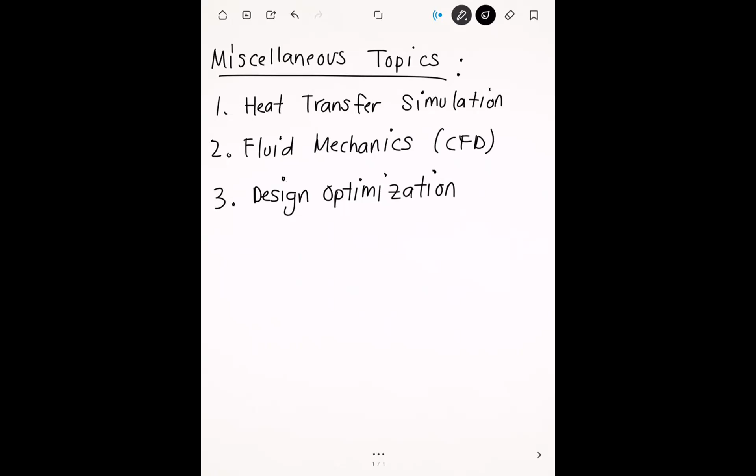How's it going, Dr. Tran? I'm good, hanging in there. Almost the end of the semester. How are you doing? Just stressed. I know, hanging in there as well. I'm hanging in there. It's crunch time right now for senior design. I bet, yeah.

What do you guys have to submit by the end of this? You have to do like a final presentation or like a design proposal? Right now, we scheduled a meeting with Dr. Mayoral. So we're meeting with him on Thursday for our critical design review. Okay. So after that, if it looks good, he'll give us the design freeze. And then from there on, we got the go ahead to work on our proposed designs. Cool, cool. Well, hoping for the best. Thanks. So are we.

How's your weekend? It's good. You know, busy but good. Yeah, I feel you. Oh, I do have a question about the final report. Maybe I can show you later after class. Okay. Or you can ask now if you want, we have some time right now. Okay. Yeah, sure. Well, I'd like to at least show you my screen about it. Oh, okay. Let me go ahead and swap that. It's not important anyway. Okay, go for it. Let me open my stuff first. Starting mechanical. Still loading. Give me a second. All right, there we go. Oh, I cannot share at the moment. Oh, sorry about that. No worries. All right, go for it. Oops, screen one. There we go.

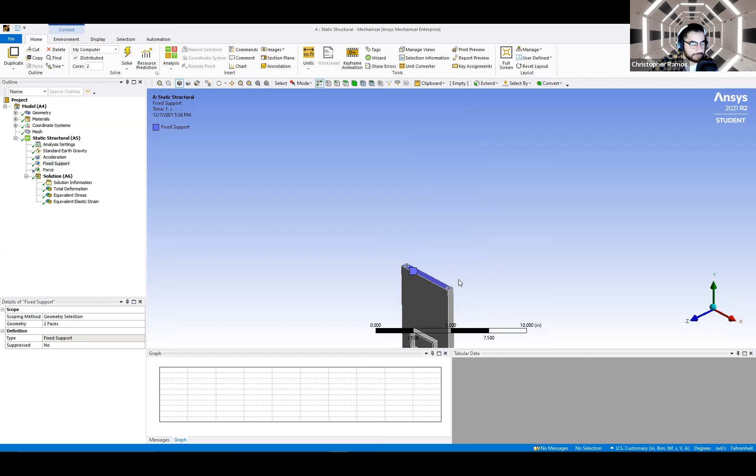I was working on my sled design for the rocket team's avionics sled. This is basically supposed to hold our electronics, and I set up some parameters. I wanted to ask you if this is a good idea. I applied a fixed boundary condition on the top and bottom, since this whole thing will be fixated by these threads over here, as you can see. So that'll hold it in place. And I enacted an Earth gravity force. As it's going to be launched, it'll shoot upward.

And I was wondering, what would be my best way to supply the amount of force? Would it be a force by acceleration or just the force by the rocket thrust? Right now, I have it based on acceleration, but the force I do have existing, I currently have it suppressed. Honestly, I think the acceleration does exactly what you say, but I like to basically apply an upward acceleration, what the force would be required for that. And I'm guessing you're applying it for the entire body, right? Yeah, for the acceleration.

I personally have not experimented that much with the acceleration, so I would lean more towards the force just because that's how I've usually done these things. Have you compared the results? Do they look similar when you do one or the other? Yeah, they're very small in nature, so I'd say it's pretty much similar. Okay. If they're pretty similar, I would just stick with the force.

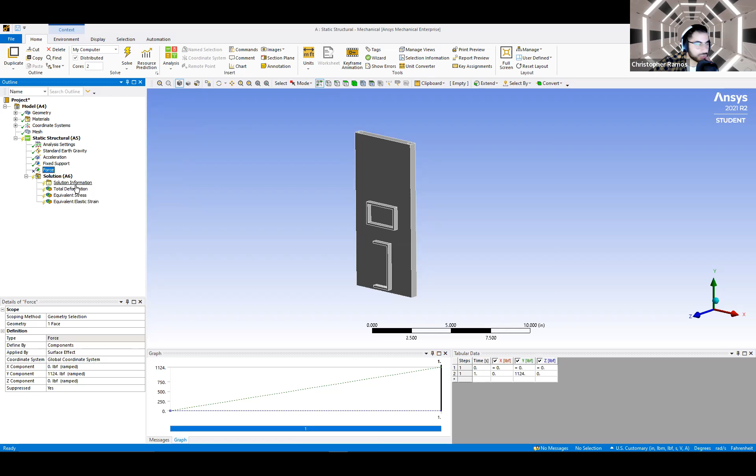The thing is, I think with this one, the more accurate thing would actually be the acceleration, because that's what it's actually doing. So if visually you're not seeing that big a difference between the results, I would actually go with the acceleration, just because that's more realistic. Intuitively that's what I would do. With knowledge of all things, I would choose an acceleration on this. It's just that I haven't personally used it all that much. For your application, I think acceleration makes more sense intuitively.

Alrighty, cool. Because the deformation is stupid small. And I expected this to survive that amount of acceleration either way because of the raw calculations we had to do for senior design. Okay, yeah, that makes sense. Hopefully something like this shouldn't break just because the whole rocket is accelerating. So this all makes sense. Cool. Okay, yeah, looks good. Awesome. Thank you. Yep.

One more thing about the project. I want to ask about simple modeling. What do you mean by that again? Can we get like a refresher? Right. So the simple model is basically a way that you're going to use to validate or verify your results.

I don't want you to just rely on finite elements to get your solution, because in reality you're always double checking the finite elements against something else. The best thing to check against would be some kind of experimental data, like if you ran a physical test on your geometry. But probably the simplest thing that you can do is a hand calculation, simplify this as much as you can so that you can calculate this by hand.

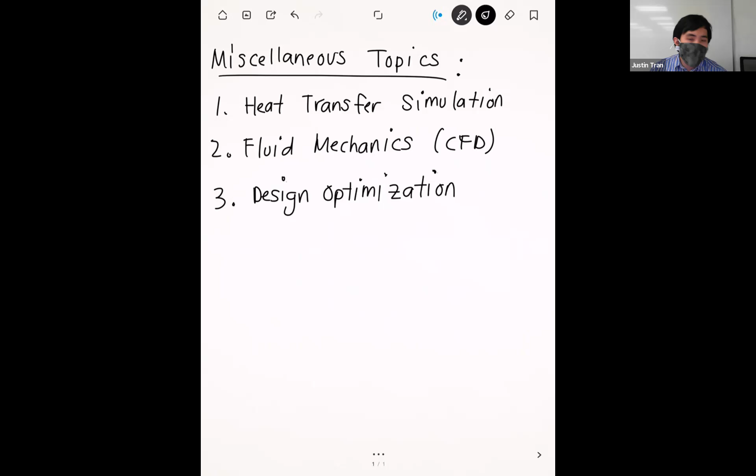So has everyone taken heat transfer, or are some of you planning on taking it next semester as well? Okay, so I think there's probably a mixed bag of people who have taken it before and people who haven't taken it yet. So no matter where you are, I think this lecture will be useful because it'll review a lot of really core concepts of heat transfer, only really the ones that you need to run simulations.

All right, so let's do heat transfer review. Let's start by talking about why we can solve heat transfer problems in finite elements in the first place. If you think back to the very beginning of the class, we talked about finite elements as just a general methodology for solving differential equations.

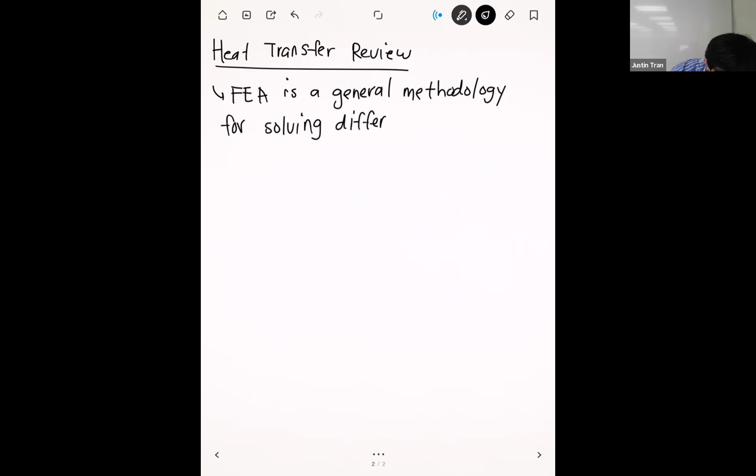We've mostly just been focusing on one differential equation, which is the structural one, but heat transfer has its own differential equation as well. And that equation is called the heat equation. In my opinion, the best named equation in all of engineering.

It's not named after some random scientist dude in the 60s, or the 16th century. And so the heat equation, in the most general form, has something like this. And this is, of course, the 2D version, but there's also a 3D version as well.

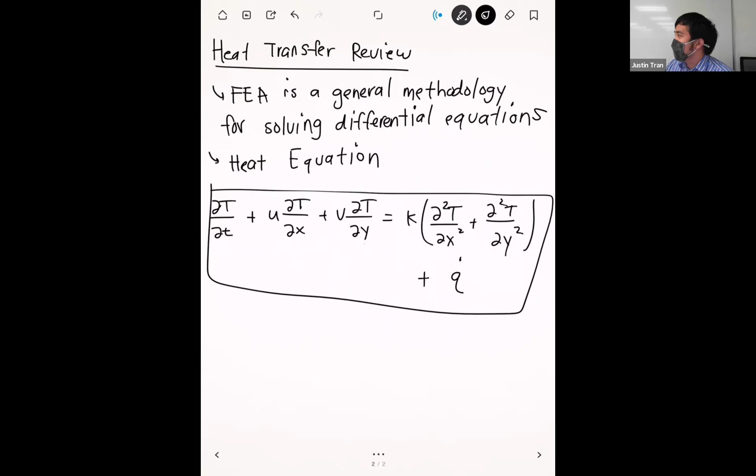And so we have this kind of big differential equation here. Even though this looks really intimidating—and I'm being very careful saying this, so don't go to Dr. Banks or anyone or Dr. Wang and repeat this—but in terms of difficulty, the heat equation is actually easier to solve than a lot of other differential equations. It's certainly easier to solve than the structural equation, and it is easier to solve than the fluids equation.

But again, don't let that comment leave this room. Otherwise, I'm gonna have a lot of angry heat transfer professors after me. You can tell that to me, but not to other people. It's going on your SOQ. That's okay—Dr. Banks and Dr. Wang don't read my SOQ, so that's fine.

All right, and so there's a lot of terms here, but the essential thing that I want you to take away from this is that what we solve this equation for is temperature.

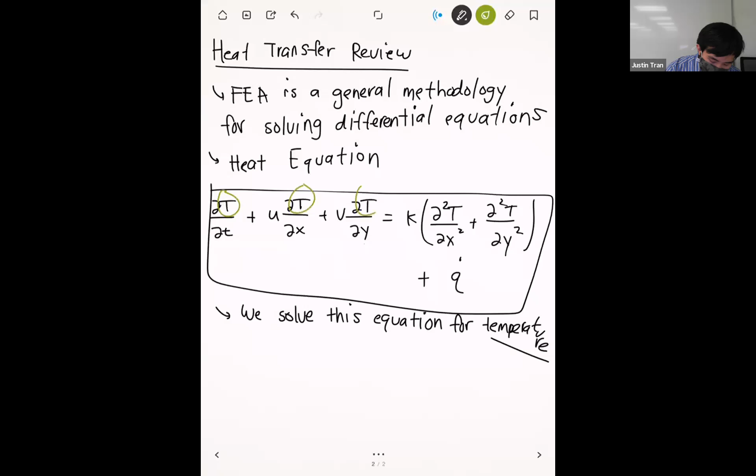And the temperature, of course, is big T right here. This tells us that when we solve a thermal finite element simulation, our primary solution variable is going to be temperature. And so if we compare this to our structural simulations, in structural FEM, our primary solution variable there is the deformation.

Because our equation is so different, and because what we're solving for is different, the way that we set up the FEM is going to be different as well. It can be intimidating because the terminology and concepts of heat transfer are very different from structural. But I'm going to show you today that you actually already have, I would say, 75, 80, 85% of the knowledge that you need to run a heat transfer FEM.

Because at the end of the day, it's still a finite element simulation. You're still going to need your geometry, still going to need to mesh, still going to need to apply boundary conditions, and still going to need to view the results. So all of those things are not going to change. The only thing that really changes is what constitutes the types of boundary conditions that we apply, and how we actually view the results. But even then, there's a lot of parallels we can draw.

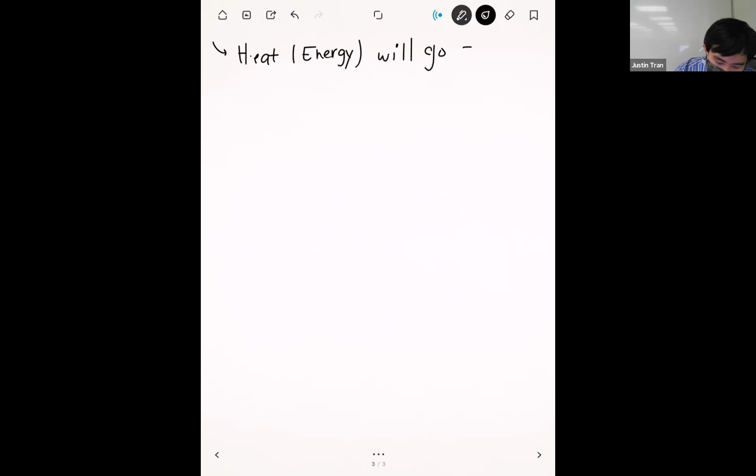Heat is just a form of energy. Heat will go from hot stuff to cold stuff. You have a surface that's hot and a surface that's cold — heat is going to go from the hot thing to the cold thing. That's all heat transfer is.

When I teach heat transfer, that's the very first thing I say in the class. I say, we don't have to take the rest of the class, you guys understand heat transfer. That's not true, of course — the whole point of heat transfer is to say how much heat is going through, and all the nuances of geometry and types of heat transfer, and so on. But if you understand this basic concept, you're going to have a great intuition for heat transfer. But don't tell Dr. Banks, don't tell Dr. Wang I said that.

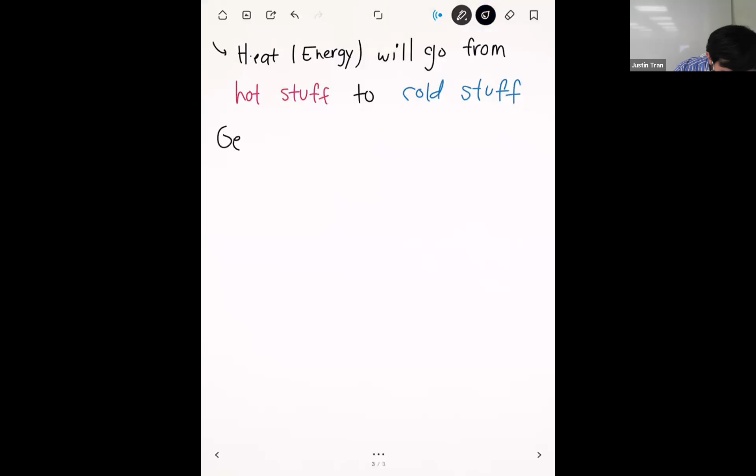And so let's go through how we actually set this up in finite elements. Let's start with the easiest thing to talk about, which is the geometry, the connections, and meshing.

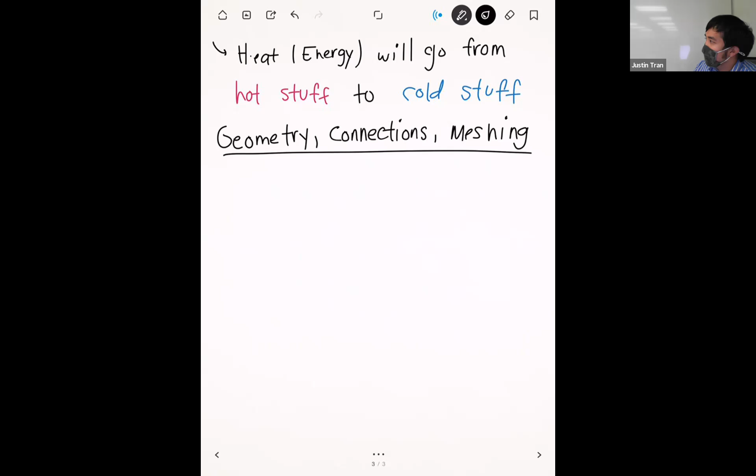The great thing about this is that the exact same process that you follow for loading in your geometry, for meshing your geometry, and defining connections if you have an assembly of parts — all of this is exactly the same as your structural FEM.

Okay, you guys have probably done this dozens of times this semester. If you want to run a thermal simulation, this part is not going to change.

The only difference here is that because our equation is different, we're solving the heat equation instead of the structural mechanics equation. This gives us a little more flexibility in terms of the types of elements we can use.

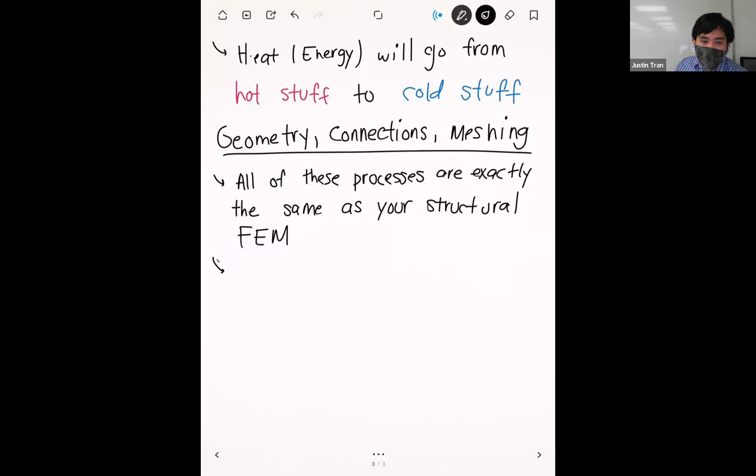In particular, for thermal simulations, it really doesn't matter all that much if you use a linear element or a quadratic element. Granted, you're still going to get a higher amount of accuracy with a quadratic element, but you don't have any extra issues. So you don't have shear - there's no shear locking in thermal simulations.

It's perfectly fine to use linear elements, and in fact a lot of software actually has this as the default. Since you don't have to worry about shear locking, you can choose to use either linear or quadratic elements. But because ANSYS makes it so easy to do quadratic elements, a lot of times it's still preferable to use them.

But if you have some reason to use linear elements, maybe you need a particularly high mesh density in a certain area - that's a little easier to do with linear elements versus quadratic without driving up your cost too much. Most of the time I'd say still stick to quadratic, but it's not a backbreaking issue like it is in structural mechanics.

Besides that, everything is still the same - you're still going to need to do meshes and geometries and all that stuff. So now let's talk about the boundary conditions, and this is where I think the biggest differences lie.

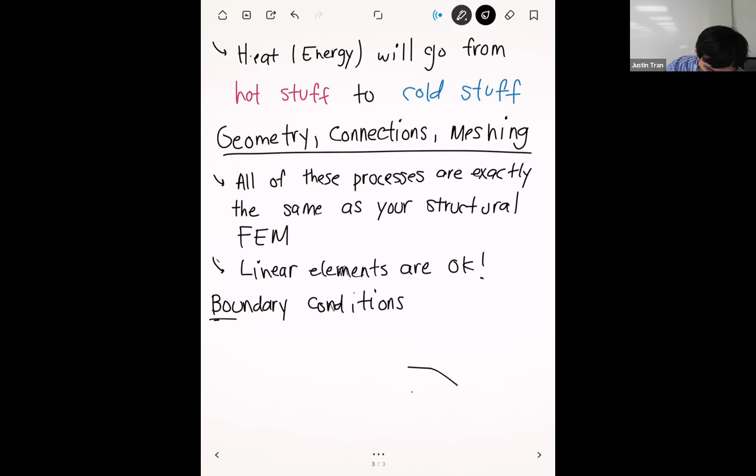Because we're solving a whole different equation, we're not going to have things like fixed supports and forces and pressures and any of that stuff. We're going to have thermal boundary conditions instead. I'm going to make a list of the most common ones that most people use in their thermal simulations, but of course there are more options than this available in ANSYS.

Along the way, I'm going to draw some connections, some analogies back to our structural FEM, just to help solidify these ideas. So the most basic type of boundary condition you can use in thermal simulations is a temperature boundary condition.

With the temperature boundary condition, you're going to directly specify the temperature at a particular surface or a particular location.

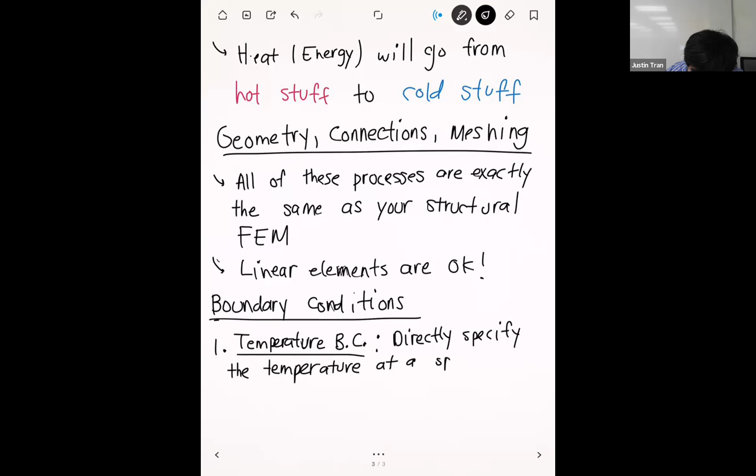Let's say you're running a thermal simulation on a particular part, and one part of the part is going to be held at a constant temperature. You say maybe that temperature matches room temperature, so maybe around 25 degrees C, or maybe it's really hot, so it's 100 degrees C. You can directly specify the temperature at a particular location using this type of boundary condition.

This boundary condition draws a direct analogy to our structural simulations, because this is exactly the same as a constraint type boundary condition.

Remember the definition of constraint type boundary conditions - they directly specify the solution variable in your problem. And if you look back at the heat equation, the thing we're solving for directly, the primary solution variable, is exactly the temperature.

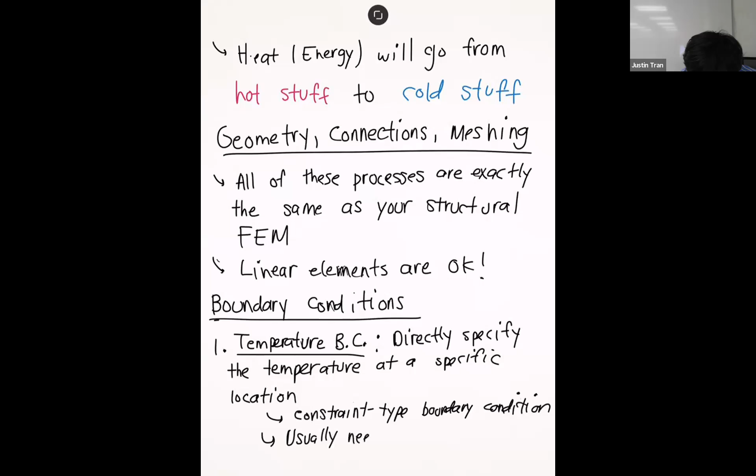Just like in structural FEM you can't run a simulation without a fixed support, for a lot of thermal simulations you can't run a thermal simulation without a temperature boundary condition. Although there are some exceptions to this, specifically with regards to convection and radiation, but we'll get there. Any questions on this?

All right, so that's temperature. The next type of boundary condition that we'll go over is heat flow or heat flux.

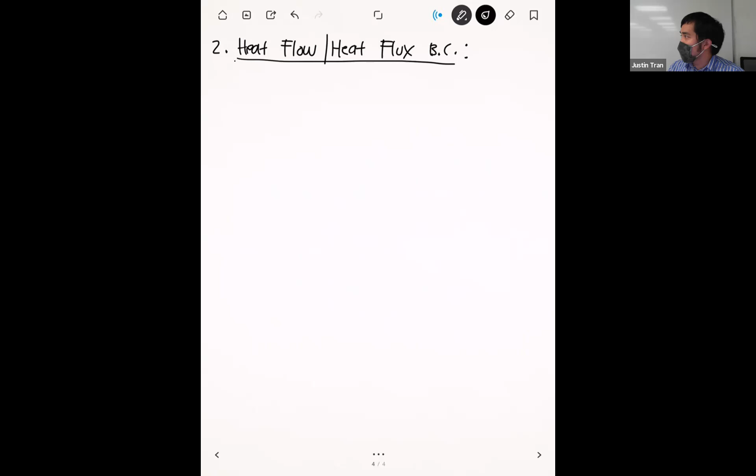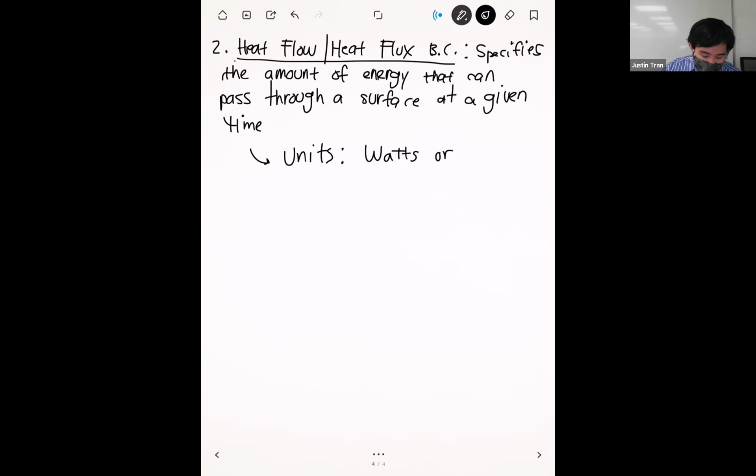All right, and so with these types of boundary conditions, you can specify the amount of heat or the amount of energy that passes through a surface at any given time. Okay. And so the typical units that are used for heat flow or heat flux are either watts. Okay. Watts for heat flow. Or the other unit for heat flux is watts per meter squared. Okay.

All right. And this is nice too, because these also kind of have direct analogies to our structural FEM. And so a heat flow boundary condition, which has units of watts, is analogous to our force type boundary conditions. Whereas the heat flux, which is watts per meter squared, is analogous to pressure.

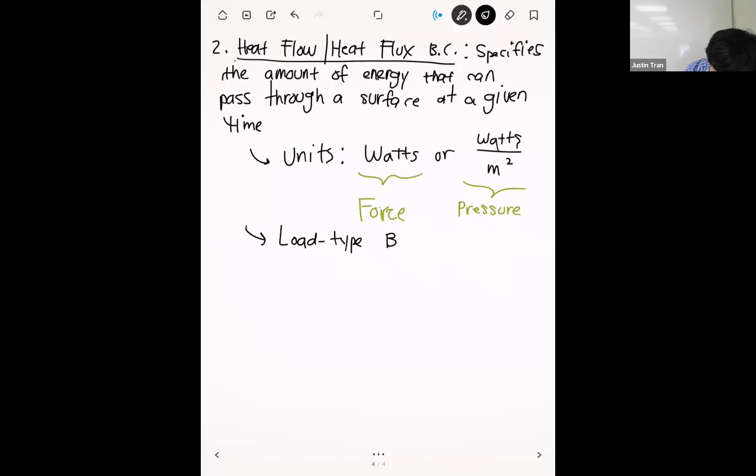Right. And so what this tells us is that, because these are analogous to force and pressure, a heat flow or a heat flux boundary condition is essentially a load type. And so just like in structural FEM, where our forces and pressures are our loads, our heat flow and heat flux boundary conditions, you can think of these as our thermal loads. And so remember with load type boundary conditions, the structure, or in this case the geometry, will react to what the loads are applying.

Okay. And so thermally, the way that you can think of this is that if you specify a certain amount of heat flux going into your surface or into your geometry, the way that your geometry is going to react is by raising the temperature, right? And so the temperature of your geometry is going to react to how much energy you're pumping into it or taking out of it.

Okay. All right. And so I think this is probably the boundary condition that people have the hardest time using, because it's a little bit hard to envision how you actually use this. And so I'm going to give you a couple examples of how you can use this. Typically, heat flow or heat flux boundary conditions are useful for cases when you know how much energy is passing through a certain surface.

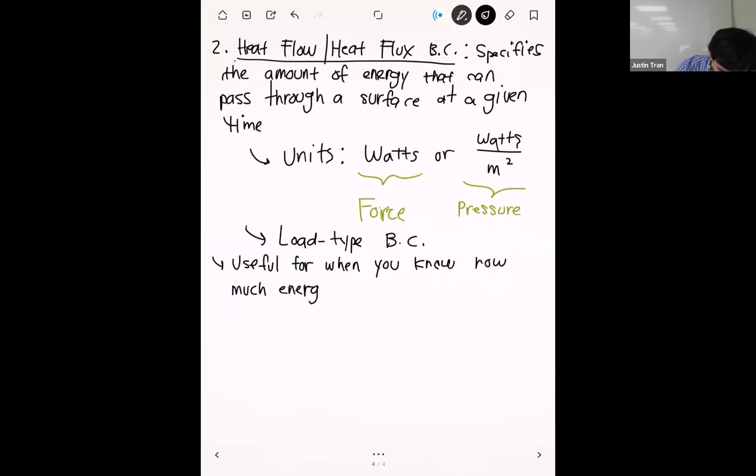Okay. And so one example of this is, let's say that you're doing a thermal simulation on some kind of combustion engine. Very, very common application.

Right. And so if you're simulating a combustion engine, one of the biggest sources of heat, which is the primary reason a combustion engine heats up, comes from the combustion reactions that take place in the combustion chamber. In your combustion chambers, you mix fuel, you mix oxygen, you ignite it, and it causes a chemical reaction to take place, which releases a ton of energy in terms of heat.

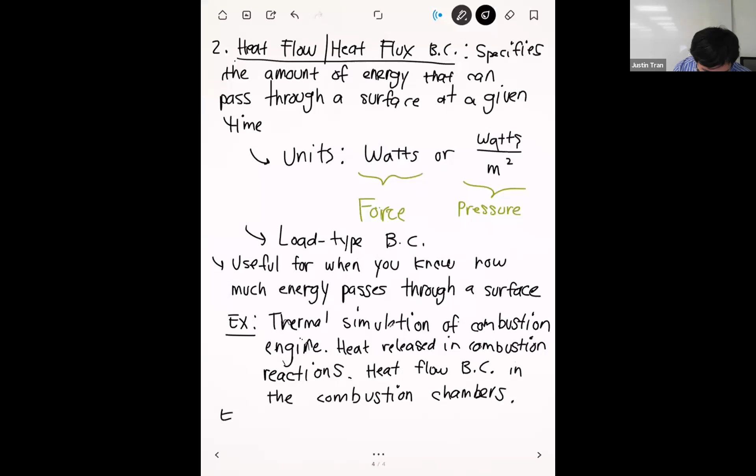Okay. All right. And so in the same vein, another useful case where you can use a heat flow or heat flux boundary condition is if you have some kind of electric heaters. Okay. And so most electric heaters, if they were made somewhat recently, have a rating of how much power they can operate at, right? And that power rating is an expression of basically how much heat is being released into the room. And so again, if you have knowledge of how much energy or power a certain device is outputting, you can use that as a heat flow or heat flux boundary condition on your simulation.

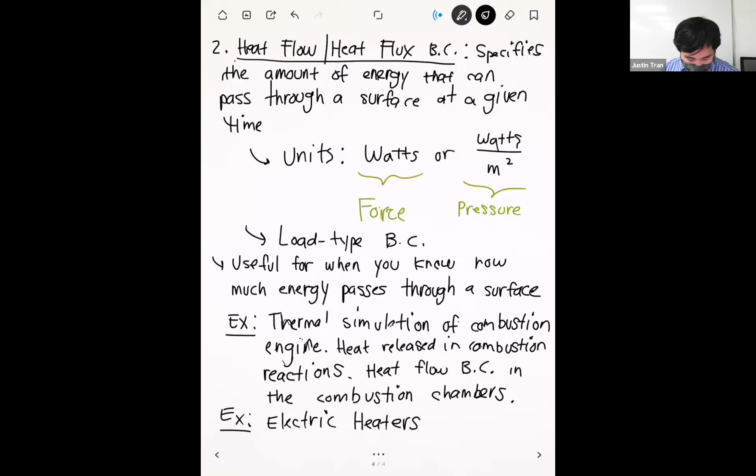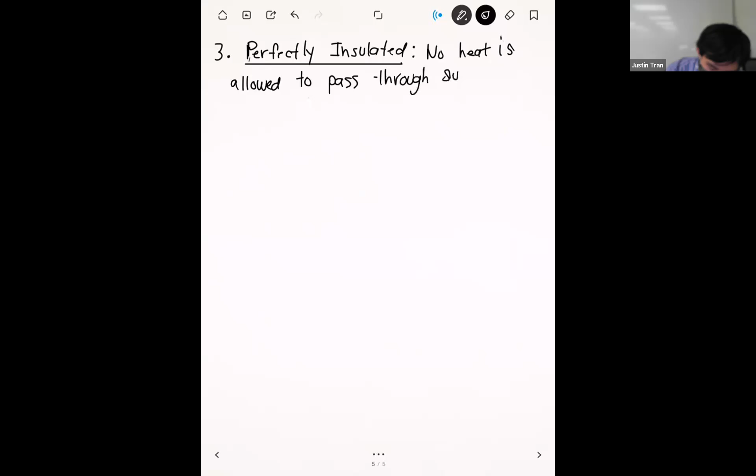Number three is not really a new boundary condition on its own. It's more of a special case of the last one. Number three is what's called a perfectly insulated boundary condition. A perfectly insulated boundary condition is one in which you don't allow any heat to pass through. It's basically simulating a case where you surround that surface with styrofoam or something, so it doesn't let any heat pass through.

Okay. And so this is a special case of the last one where you're basically specifying a heat flow boundary condition, but you're just setting it equal to 0. But they separate it out just to be a little bit more convenient. It's the same logic as the reason why a fixed support boundary condition exists in ANSYS. A fixed support boundary condition is nothing more than a displacement boundary condition where you set everything equal to 0. So perfectly insulated is the same thing: nothing more than a heat flow boundary condition set equal to 0.

In reality, it's impossible to get a surface that's perfectly insulating. No matter how good your thermal engineering is, if you have something that's hot and something that's cold, heat's going to go from the hot thing to the cold thing. You can insulate it as much as you can to try to limit the amount of heat that goes through, but there's always going to be a little bit of heat. So perfectly insulated is an approximation for sure. But in a lot of cases, it's very valid because the amount of heat transfer that can pass through an insulated surface is usually so small that you can ignore it compared to other effects.

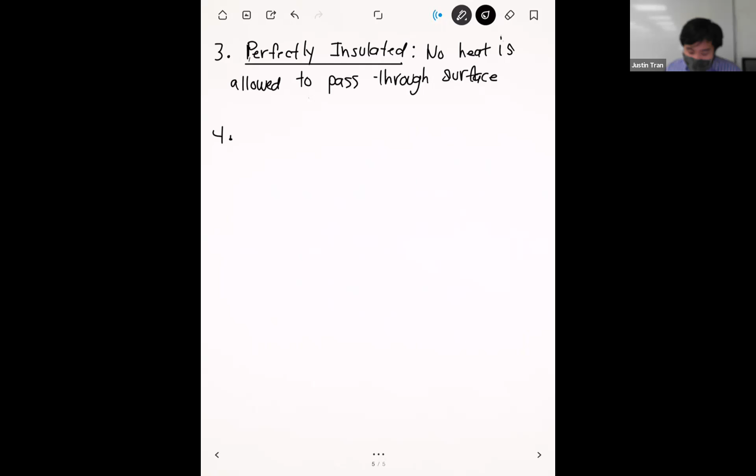Okay. And so the next type of boundary condition is a convection type boundary condition. A convection type boundary condition models the effects of convective heat transfer. And if you don't remember what convection is, or if you haven't taken 407 yet, convection is just any kind of heat transfer that occurs to a moving fluid.

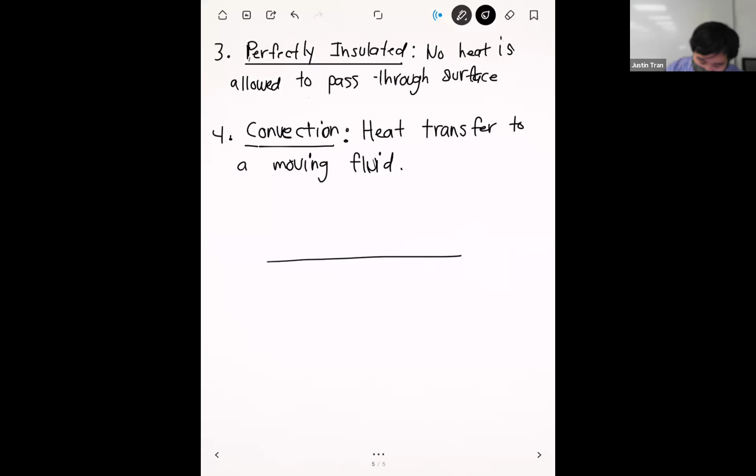All right, and so schematically it looks like this. Let's say that you have your surface here, and the surface of the solid is at some temperature Ts. Then on top of the surface, we have some kind of moving fluid. In most cases, this is some kind of air. Or in other cases, it could be water, like a water-cooled surface. Or any fluid works.

As long as the fluid is flowing, as long as it's moving, then you're going to have convection heat transfer occurring. And usually we use the symbol T infinity, and T infinity here denotes what I call the ambient temperature, or in other words, the temperature of the fluid.

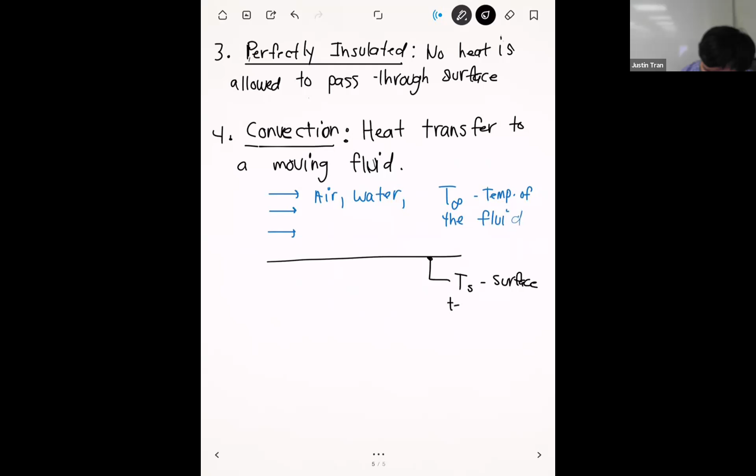Where Ts here is surface temperature. All right. And so with all those things considered, the equation that we use to govern convection heat transfer is known as Newton's law of cooling. And so Newton's law of cooling states that if you have a convection situation where you have heat transfer to a moving fluid, the amount of heat that gets transferred is based on this equation. Okay.

All right, so we have q, and little q here stands for heat transfer. Okay, and the units for this is watts. This is going to be equal to h times A times the difference between the surface temperature and the ambient temperature. Okay, so we have Ts minus T infinity.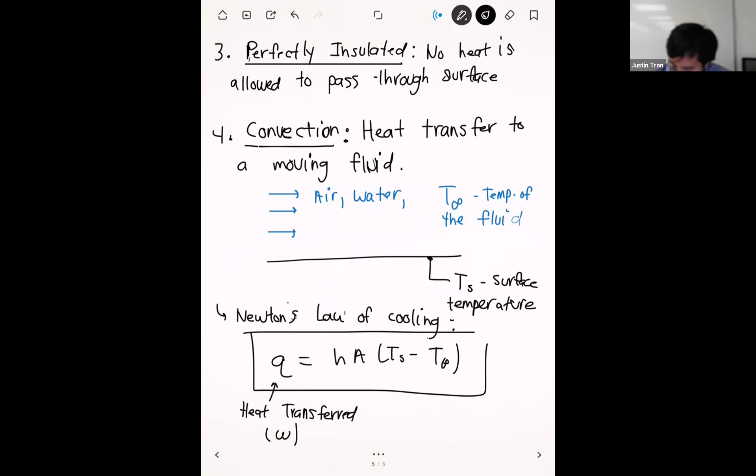All right. And so let me go ahead and label the rest of the terms. So you already know Ts and T infinity. A here is the surface area, the surface area of whatever surface that you're considering. And h here is what's called the convection coefficient. Okay. All right.

And so the reason I bring this up is not to transform this class into 407, but this equation right here is a really good place to visit so that we know how to prescribe a convection boundary condition in ANSYS, okay? Because in ANSYS, there's going to be two primary things that you're going to need to specify. You're going to specify h, and you're going to need to specify T infinity.

Right, and so I bring up this equation just to kind of remind you what these parameters are and how they factor into the equation. Okay, estimating these values is kind of another story altogether, but we'll get to that on the next page. Okay. All right. Any questions on this? Okay.

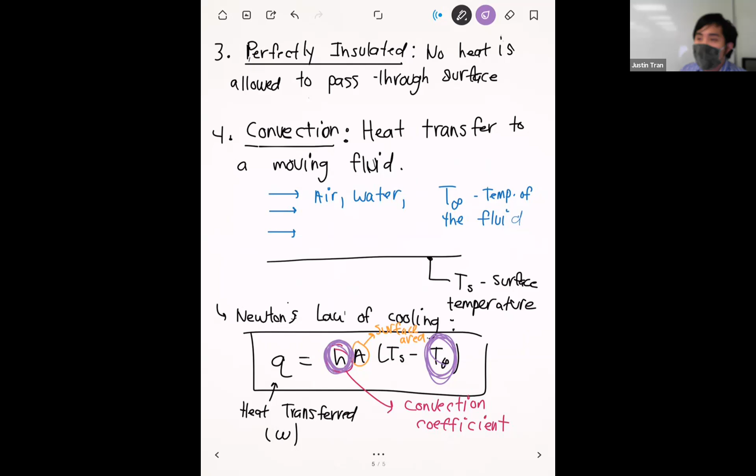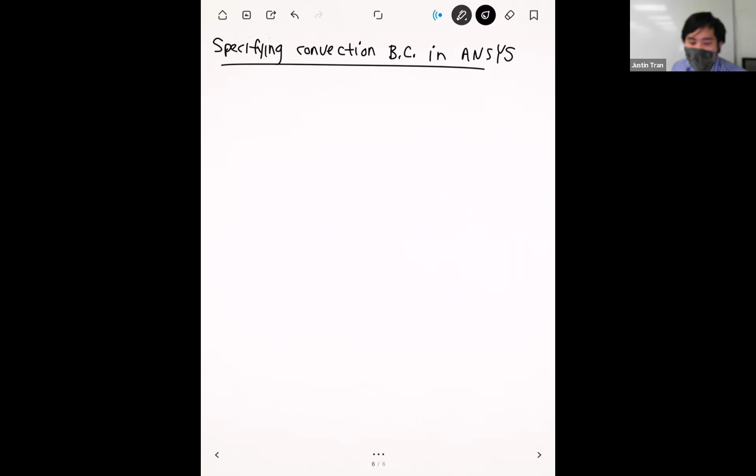Okay. And so let's talk about how do we specify a convection type boundary condition in ANSYS. If you want to specify a convection boundary condition in ANSYS, just like I mentioned, there's two quantities that we have to specify. So we'll do the easy one first, and then we'll do the hard one. Okay.

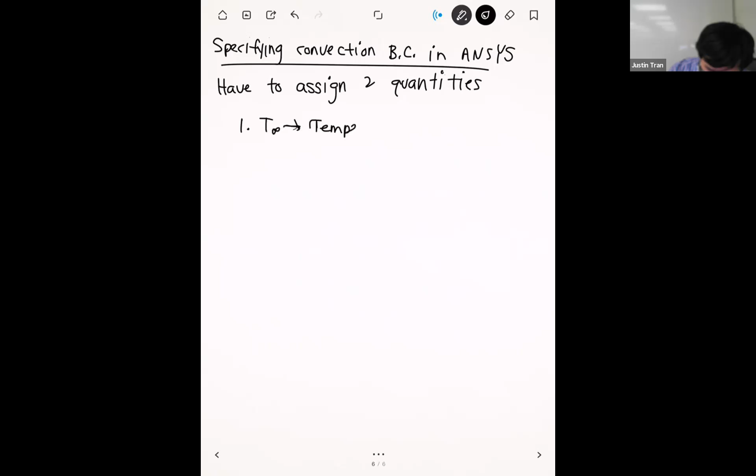Right. And so the easy one to specify is T infinity, where T infinity, remember, is the temperature of the fluid. This is usually something that's known beforehand. Let's say that you're doing a thermal simulation on a car that's driving on the 57 freeway. You know what the temperature of the air is outside because you have a weather app on your phone, and you can just look up the temperature really easily. So the temperature of the fluid is usually not that hard to determine.

And so you can either use air temperature if you have an outdoor application, or if you have an industrial application, let's say you have water cooling or something like that, knowing the temperature of the fluid is not that hard to determine. Okay.

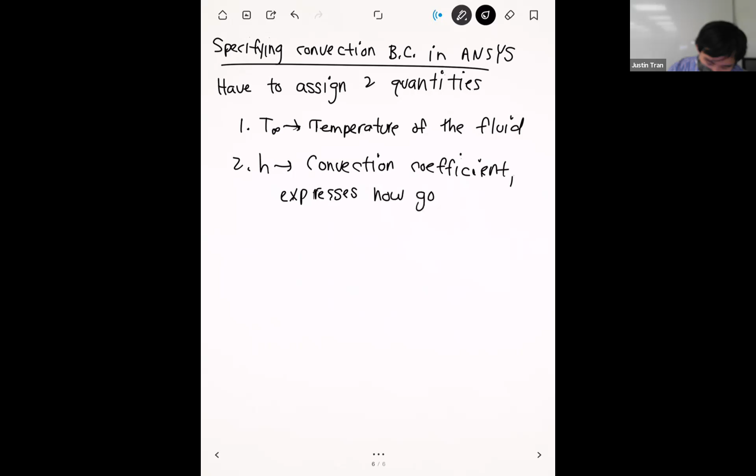The more difficult one is h. And so h is the convection coefficient. Intuitively or conceptually, what the convection coefficient expresses is how effective, or how much convection heat transfer we are going to get. Or in other words, it expresses how good this fluid is at transferring heat. Okay.

Which sounds easy in concept, but the variables that h depends on are many and themselves hard to determine too. Some of the factors that can affect h are things like the velocity of the fluid, so how fast it's going. Let me say it depends on. Right, so if your fluid is going faster or slower, that's going to affect how good the convection is. Okay.

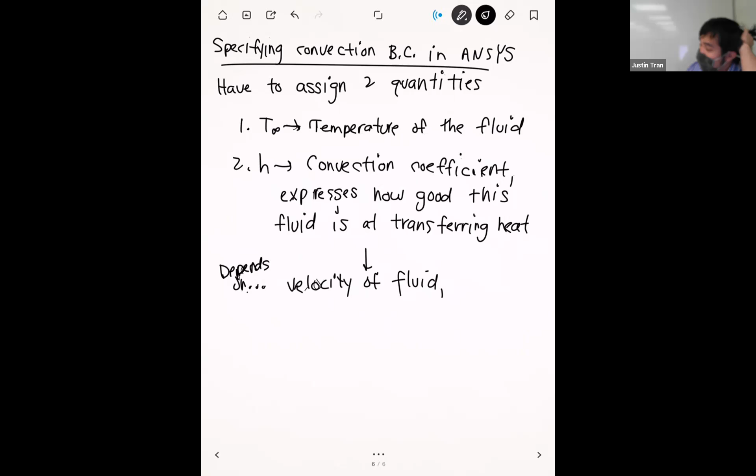It depends on what I like to call the nature of the flow, and so that's whether your flow is laminar or your flow is turbulent. So it's going to depend on those factors as well. It's going to depend on the fluid material properties. Oops. Okay. Some fluids are just going to be naturally better at transferring heat than others.

So if you have some kind of liquid metal, let's say that you have liquid mercury, for example, that's going to be a lot better at transferring heat than just plain old air. Okay. And the main difference for that is the thermal conductivity of the fluid. Okay.

And the last one is the geometry of the flow, or I shouldn't say the last one, I said the last major one. Okay. And so whether your flow is going to be turning, or it's going to have some recirculation zones, or whether it's going to be hitting your part exactly. Okay. So the geometry of the flow is going to affect H as well.

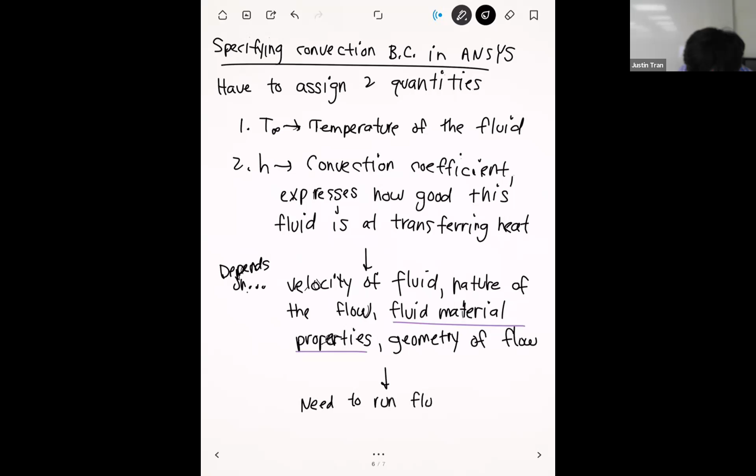Okay. And so the unfortunate thing is that with the exception of the fluid material properties, everything else here is incredibly difficult to determine. Okay. And in fact, for most cases, if you want to find out all of these flow quantities, you actually need to run a fluid simulation to get this. Okay. Which is not a trivial task. And so, running a fluid simulation so that you can run a thermal simulation is like peak complicated engineering stuff at its finest, right? And so it's not easy.

Okay. And so, determining a good value of H is, I think, probably the most challenging part of running a thermal simulation. And if you've taken heat transfer before, you would probably agree it's one of the more difficult things to do in just regular old heat transfer as well. Okay. And so I don't really have great advice for you for good ways to solve for H. If you feel strong in your heat transfer knowledge and you want to apply your concepts from EGME 407, definitely this would be the place to do it. Okay.

You can also run a CFD simulation to determine H. I've seen people do that before, and it's really cool. I haven't personally done it myself, and so I'm not actually sure how to do it. But I know that that's kind of generally the practice in industry. But of course, that takes a lot of work as well. Okay. And so if you're running a thermal simulation, the convection boundary condition will probably easily be the most difficult part, and the difficulty is going to be in determining what H should be. Okay.

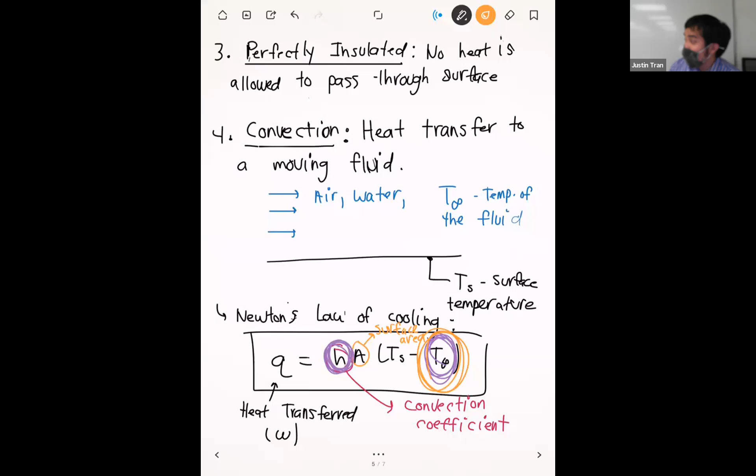Oh, I didn't mention what type of boundary condition it is. Okay, and so a convection boundary condition, you can kind of make arguments whether this is a load or a constraint, but actually, because we're specifying this temperature right here, a convection type boundary condition is actually a lot closer to a constraint than it is to a load. Okay.

And so it's actually possible to run a thermal simulation without any directly specified temperatures if you use convection type boundary conditions. Okay. And remember, if you use convection, you're directly specifying what the fluid temperature is, and then that fluid temperature kind of translates to your surface. Okay. And so that's one of the nice things about convection, it acts as a constraint for you in your equations. Okay. All right. And so the last boundary condition that we'll talk about is the radiation boundary condition.

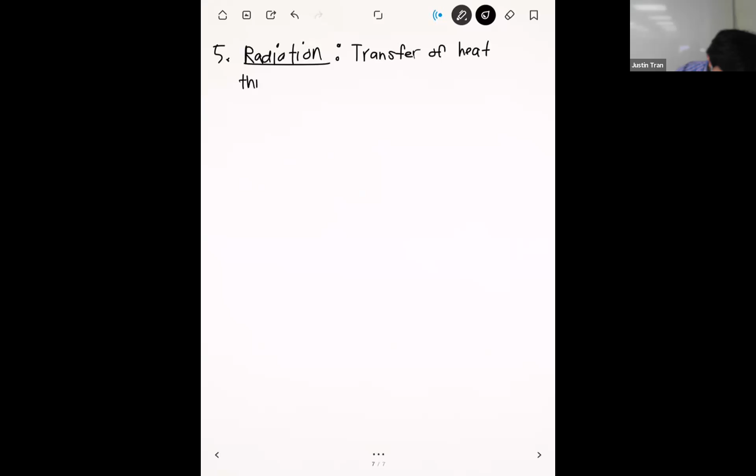Okay. And so radiation, if you haven't taken 407 or if you forgot, radiation is the transfer of heat between surfaces through electromagnetic waves. Okay. It's the only form of heat transfer that doesn't require a medium, and so it doesn't require any material. Okay. And so that's how the heat from the sun reaches the earth.

Okay. And so, I've always hated the expression that scientists and teachers say, oh, without radiation, we'd all be dead because the sun's heat wouldn't reach here. That's true, yes. But you can say that about a lot of things in science. And so, we can say that without airflow, we'd be dead. Without oxygen, we'd all be dead. It's like, yes, we get it. Life is complicated and it's a very complex, interconnected network. But without radiation, the sun's heat wouldn't reach us and we'd have no source of heat. And so, that's my grand statement about radiation.

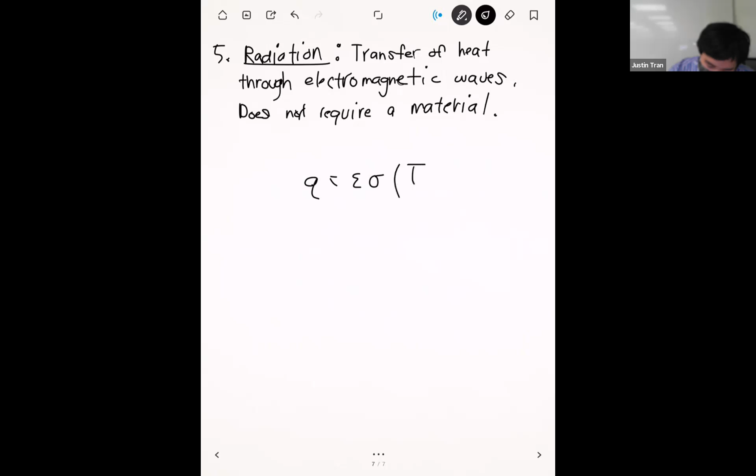Okay. All right. And so the formula for radiation, I actually don't know if it has a name. I just call it the radiation heat equation. Okay, it is given by the following. Okay. And so we have two quantities, epsilon times sigma. Okay. And it's Ts to the fourth minus T infinity to the fourth. Okay. And again, I'm bringing up the equation for radiation heat transfer just to explain what you need to specify within ANSYS. Okay. All right.

And so let's go ahead and label all of these terms. Okay. So Ts is the same. So Ts is the temperature of your surface. Okay. T infinity, this is the ambient temperature outside your surface. And so this kind of has the same definition as the T infinity for convection. Okay.

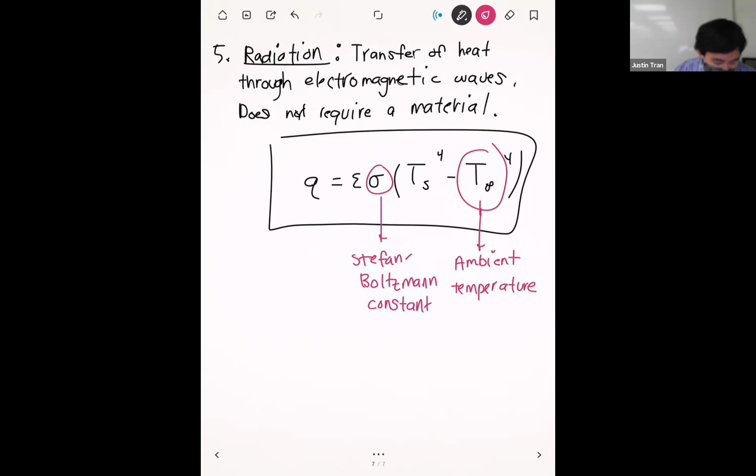Sigma here, let me get this dude's names right. Okay, so this is the Stefan-Boltzmann constant. If you've had me before, I hate it when people name their scientific concepts after their names because this tells me nothing. It only tells me that some dude named Stefan and his friend Boltzmann came up with this constant. And it's really important for heat transfer apparently.

Okay. If I ever get smart enough to name a constant or name an equation, I'm gonna call it "fuck your name" equation or something like that. Because I hate it when... Yes. Fucking amazing. I'm not gonna put my name on an equation like that. Okay. All right. Anyway, it's the last week.

I'm having fun. And so the last parameter here, and this is the most important one, this is the emissivity. And so the thing with radiation is that how effective your surface is at radiation is determined by how well your surface can emit light. And so this determines... So this is a constant, and it's actually somewhere between 0.0 and 1.0.

And what this expresses is how well your surface emits, basically how well it emits light. Because there are some surfaces that are better at emitting light than other ones. And so this constant is basically a coefficient that determines it.

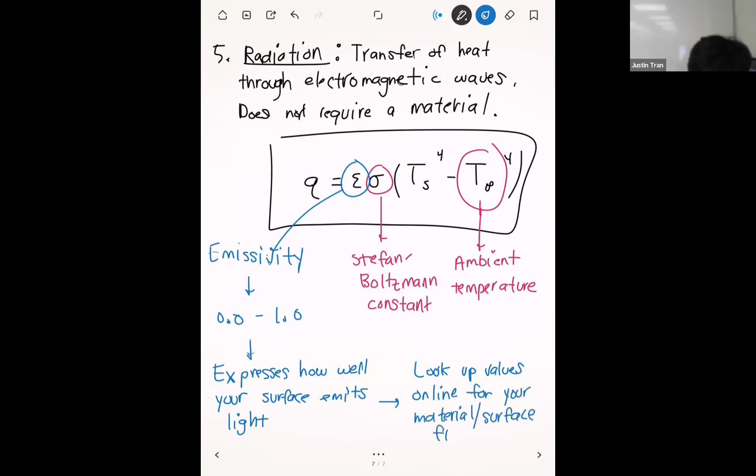And the way that you look this up is that it's a property of your material, so this is usually something that you can look up online. And so that's the radiation heat equation. Just like in convection, the two parameters that you directly have to specify are the emissivity, so how good your surface is at emitting radiation, and you have to express the ambient temperature as well.

This is usually a little bit easier than convection because for the emissivity there's a bunch of data, a bunch of tables on it. It's not flow specific, it's not geometry specific, so that's usually something you can look up without any trouble. But with that said, radiation a lot of times is pretty negligible, and if you're taking 407, you know this too. For a lot of situations on Earth, we just neglect radiation altogether.

So unless you have some kind of space application, like doing heat transfer on a satellite where there's going to be no conduction, no convection, a lot of times you can leave radiation out and it's not going to change your results. And just like convection, because we're specifying this ambient temperature right here, radiation actually does count as a constraint as well.

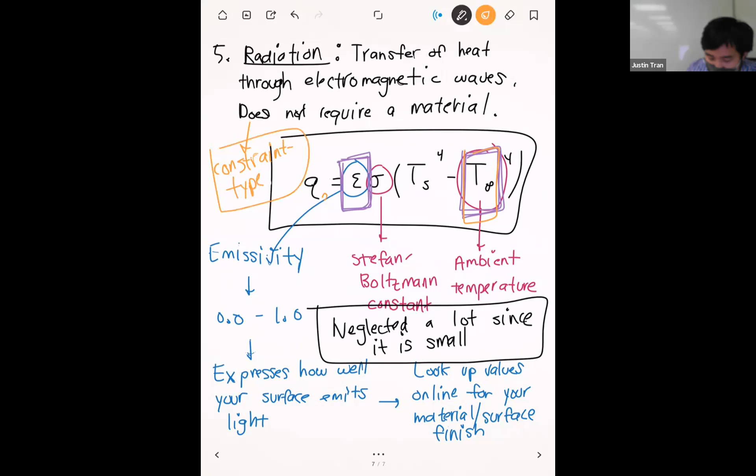In fact, a lot of thermal simulations that I've seen on satellites rely on the radiation boundary condition to provide a constraint because there's no other temperature that they can directly specify. All right. Any questions on radiation?

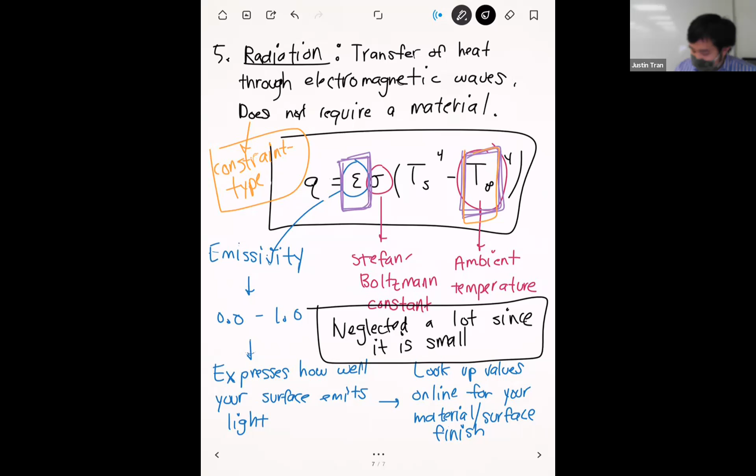Actually, there's one more boundary condition. Although it's not technically a boundary condition, it's kind of the same thing as standard Earth gravity, so I do want to go over it very quickly. That's internal heat generation. Just like standard Earth gravity will apply to your entire body, this basically expresses how your body can actually generate heat on its own.

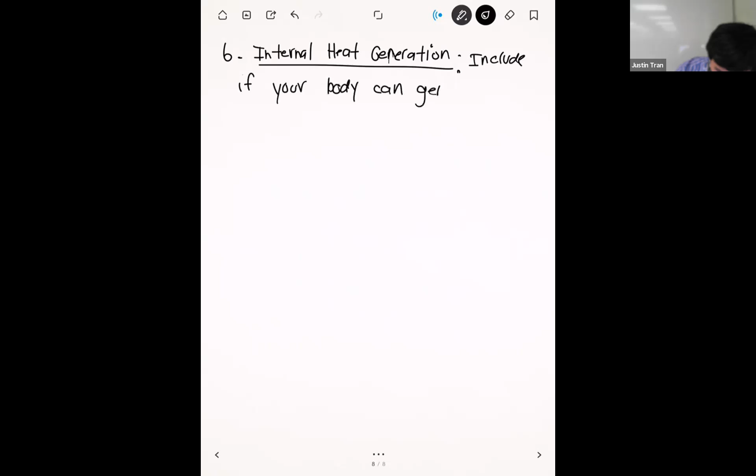Okay, so I'll say that this is not very common. The only situation where your body can generate heat is if you have some kind of chemical reaction going on, which is not all that common. But the option is there if you do want to do that.

All right, before we jump into the sample simulation, let's quickly talk about what outputs you can view. I'd say there's two primary outputs that are usually of engineering interest.

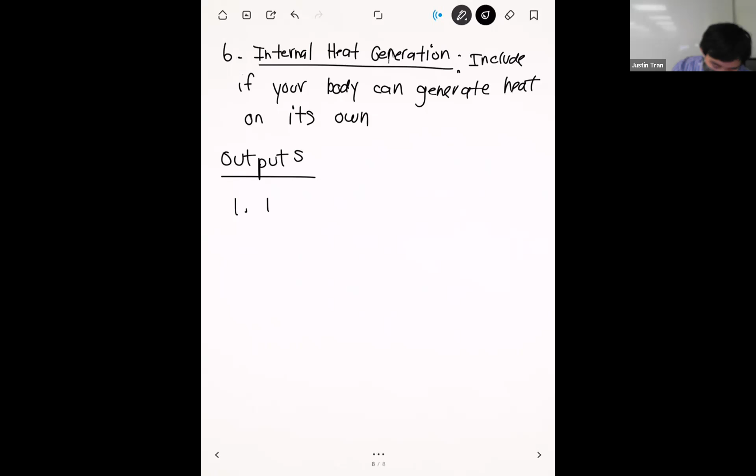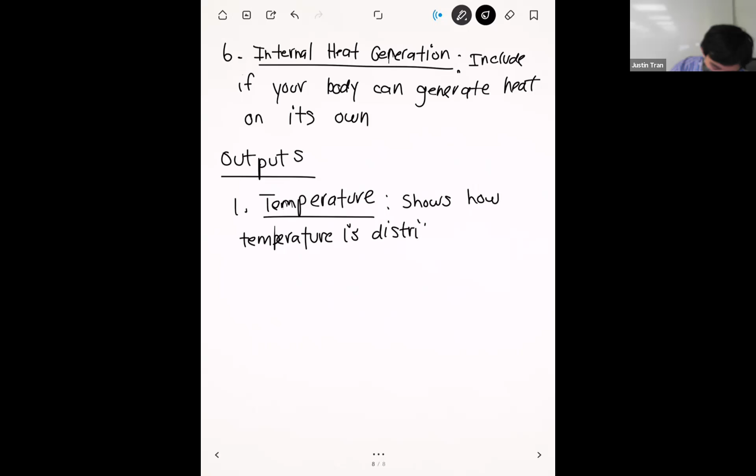The first one, of course, is temperature. The temperature output will show you how temperature is distributed throughout your body. Of course, the temperature distribution will be a literal heat map. I might have used that term throughout this semester about the equivalent stress field being a heat map, but this is literally a heat map because it'll show you what the temperatures are.

All right, and so the other type of output we have is heat flux. This tells you how much heat or how much energy is entering or leaving your system at specific locations.

This could be useful if you want to determine, if you have a situation with a lot of heat loss, where you're losing most of your heat. That can tell you where you need to add insulation into your geometry.

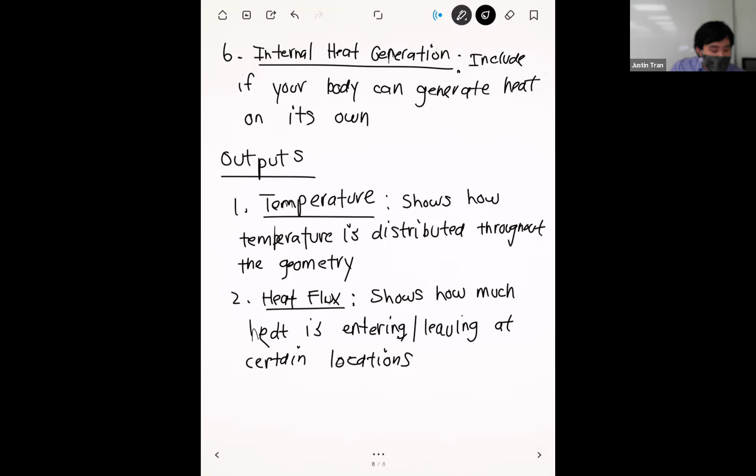Professor, so the heat flux, is it an output? I thought it's just an input, like a load type input. Yeah, so you can directly specify the heat flux at certain locations, and if you do that, that would be a boundary condition, an input. But for all the places where you're not specifying the heat flux, heat is going to enter and leave your geometry at those locations as well, depending on what the temperature is there and what the temperature of the surroundings are. So the heat flux output will show you what locations in your model have energy coming in and out in places where you didn't directly specify it.

Okay, let me go ahead and switch to the computer. Let me go ahead and bring up the notes which I have here. Wrong class, but it's the exact same notes.

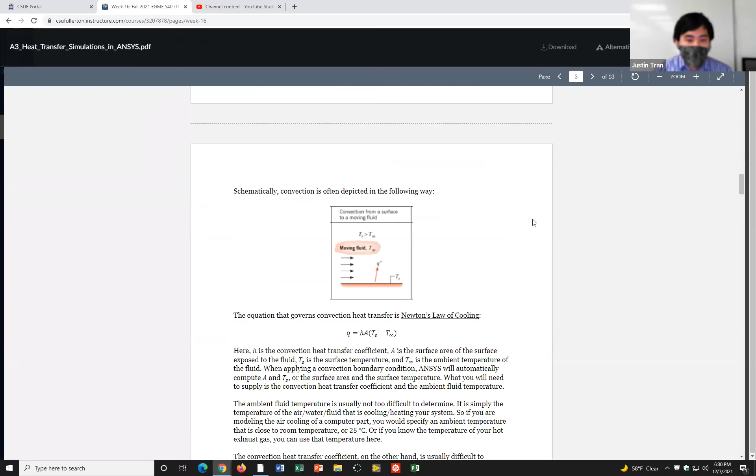All right, we're going to do a very simple simulation on a thermal fin. If I scroll down, this is the situation we're going to look at. We're going to have a cylindrical fin with a directly specified temperature on one side, a temperature of 100 degrees Celsius, and the other side will be perfectly insulated. It's going to be cylindrical with a diameter of 5 centimeters, and the length is going to be 100. We're going to have radiation, convection, and all that good stuff.

I should have done this earlier, but let me go ahead and start up Workbench. We can go ahead and look at the example in the meantime. Through this example, you're going to see kind of how I apply all the boundary conditions that we talked about before. Oh, one thing I forgot to talk about too is the material properties.

And so while that's starting up, just like in structural simulations, you have to supply material properties as well. And the primary material property here is what's known as the thermal conductivity. The thermal conductivity is a property of your material which tells you how effective that material is at transferring heat.

All right, and so since we're doing a thermal simulation, we're going to go to the toolbox here and click and drag steady state thermal. Just like the name implies, this is a thermal simulation that's steady state. Since I don't have the geometry prepared, we're just going to make it from scratch really quick, but it is just a cylinder, so it shouldn't take too long.

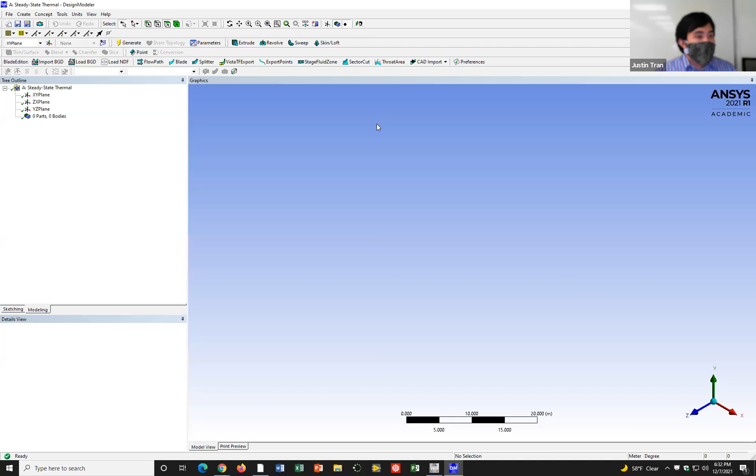Okay, so here we are in DesignModeler. Let me change the units to centimeters. So let's go ahead and go to the XY plane.

There we go. All right, so we're going to draw a circle. We're going to dimension it, make this... what's the dimension? 5 centimeters. Okay, all right, we're going to go back to modeling here.

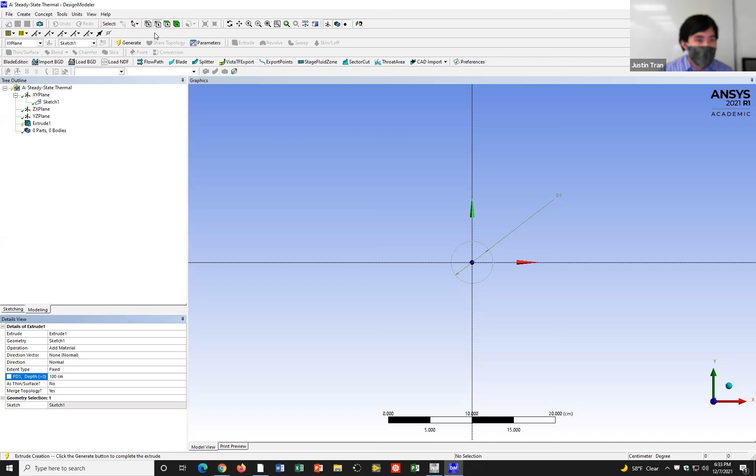Here is our sketch, and so I'm going to extrude this, create extrude, and we're going to apply this to sketch 1. We're going to add material, and we're going to extend this out for 100 centimeters. Okay, we're going to click generate, and there we have our cylinder.

I'm going really fast just because we are almost out of time. But of course, this is not something that you have to turn in, but if you want to follow along, I just produced the cylinder really quickly. All right, and so now that the cylinder is created, I'm going to go ahead and close this out.

And then we're going to jump into ANSYS mechanical. It's a little bit confusing because we still use the same program, and so the program is still called mechanical, even though we're running a thermal simulation now.

And I'm just going to use the default material here, which is structural steel. Let's look at the material properties for structural steel while that's loading up. All right, and so we have structural steel right here.

And you can see that the thermal conductivity here, which is how much heat can pass through, is 60.5 watts per meter K. And so this is a fairly moderate thermal conductivity, definitely on the higher side because it's a metal. Metals tend to have higher thermal conductivities than other materials, but it's not as high as what copper would be.

All right, and so just like we usually do, let me go ahead and change the units to millimeters. Let me make the element size here 1 millimeter. Okay, let me go ahead and create this mesh.

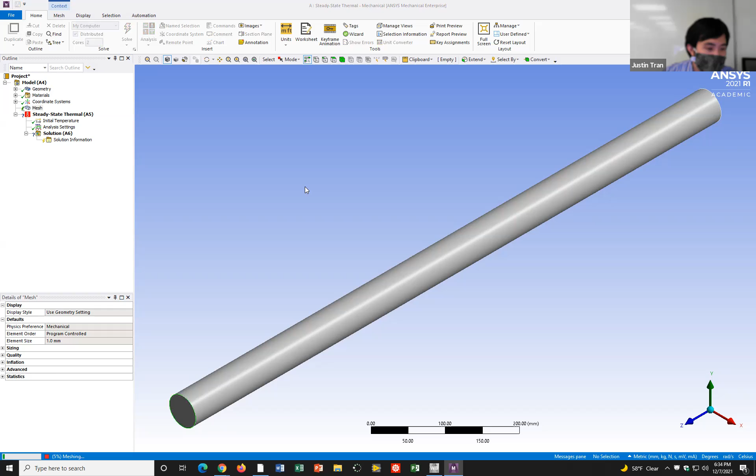Yeah, that was a little bit too small. Oh yeah, that is too small. Stop. All right, so let me do 10 millimeters.

Okay, and so here we have our mesh, and we were fortunate enough to get a hexahedral mesh, so this looks good. Okay, so now let's go ahead and apply our boundary conditions.

And so if we go back to the figure here, we can see that we have a specified temperature on one side, and then an insulated, perfectly insulated boundary condition on the other end. So let's go ahead and apply those boundary conditions.

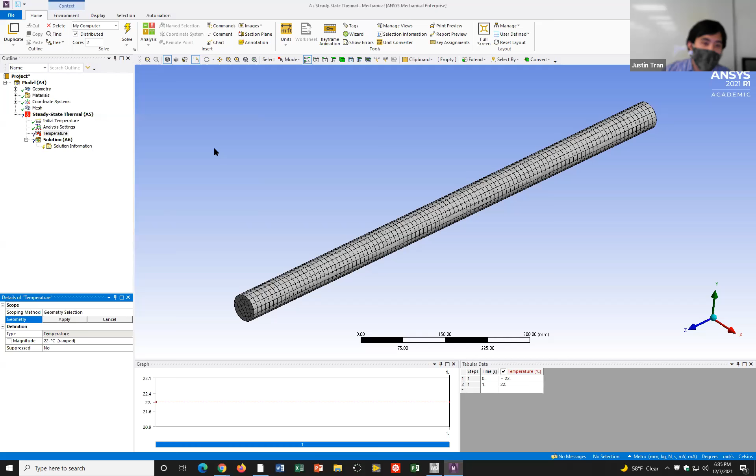Okay, so I'm going to go ahead and right-click on steady state thermal. We're going to go to insert, and then we're going to start with the temperature boundary condition. I'm going to click on temperature, specify the surface I want to apply it on, one of the ends of the cylinder here. And the temperature we're going to specify is 100 degrees C.

Okay, and so the next boundary condition we're going to apply is the perfectly insulated boundary condition on the other side. I'm going to right click on steady state thermal, go ahead and go to insert, and then the boundary condition you want to highlight here is perfectly insulated. All right, so let me go ahead and click that.

I'm going to go ahead and select that surface over there, and so that's going to prevent any heat from escaping the other side of the fin. We're assuming that the fin, no heat is coming out from the tip. All right, and so those are the two end-type boundary conditions.

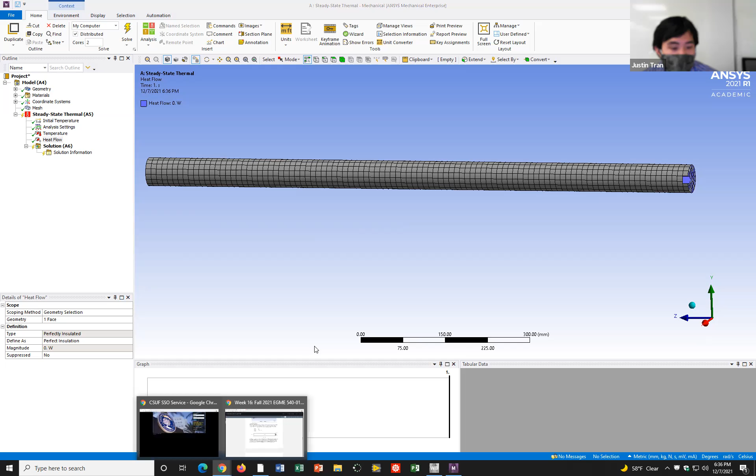Now let's go ahead and specify the convection type boundary condition. And so remember, we're going to have convection heat loss from the sides of the cylinder, from the sides of the fin, right?

So this is simulating the fact that maybe we have some air blowing over the fin, and it has a convection coefficient of 0.5 watts per meter squared K, where K stands for Kelvin. In this case, I'm giving you the convection coefficient, so you can just plug it in.

But most of the time this isn't going to be given to you, and in fact it's going to be a bit difficult to solve. But since this is just a demonstration, I'm going to go ahead and give the convection coefficient to you.

To apply a convection type boundary condition, we're going to right click on steady state thermal, go to insert, and then go to convection type boundary condition right here. You can see that the symbol for convection is a fan, meant to symbolize some kind of airflow type boundary condition.

So we have convection, and I'm going to go ahead and select the side of the cylinder here, since we're having convection heat transfer off the side. I'll hit apply, and you can see on the bottom left it's asking us to specify two parameters: what the film coefficient is.

Let me go ahead and switch the units, because the convection coefficient I gave you is in watts per meter squared K, so we want to make sure we're in the same ones here. I switched the units to meters, so now we can specify the film coefficient in terms of watts per meter squared degree C, which is the same thing as K. Our film coefficient here is 0.5, and our ambient temperature, which is the temperature of the air, is 25 degrees C.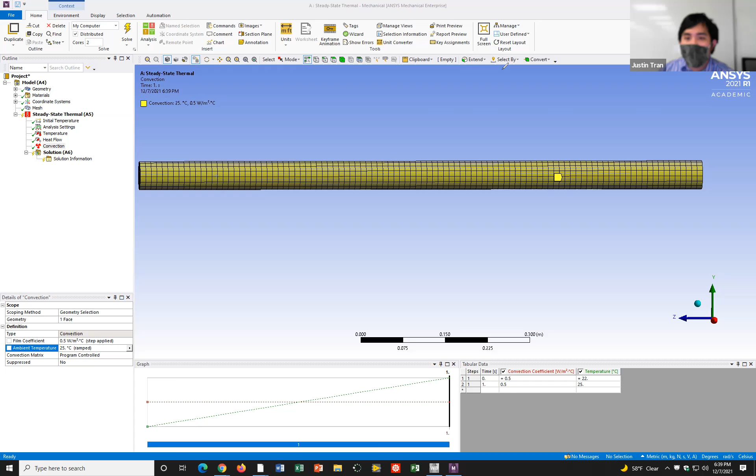Can you explain again how C is K this time? So C stands for degree C, and K is Kelvin, and they both kind of share the same units. To convert from degree C to Kelvin, you do 273 plus degree C equals K. K is a measure of absolute temperature, so absolute 0 refers to 0 degrees Kelvin, whereas degree C is a unit system based on the freezing point of water, so 0 degrees C is when water freezes. No, I thought you meant the same degree of C could be the same value for Kelvin. Oh no, it's not - they are different values, but the units are the same, so watts per meter squared C is the same thing as watts per meter squared Kelvin. Okay, cool, thank you.

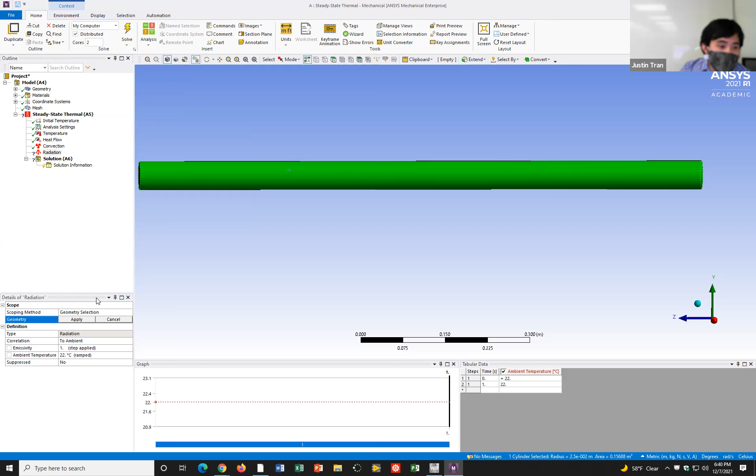The last thing we're going to specify is the radiation boundary condition. Let's right click steady state thermal, go to insert, and go to radiation. We're going to select the same surface we did for the convection - it's actually perfectly fine to specify multiple boundary conditions on the same surface, and this is true in static structural as well. It makes sense here because we're going to have both convection and radiation heat transfer from the surface.

I'm going to select the entire lateral surface of the fin. The emissivity here we're going to set to be 0.3, because that's what it's specified to be in the problem, so epsilon equals 0.3, and then the ambient temperature is going to be 25.

All right, now that we're done specifying the boundary conditions, we can go ahead and specify our output fields. We have output fields of temperature and heat flux. Let me right-click Solution A6 here, and we're going to insert an output field for temperature. This is going to show us the temperature at all locations on our entity.

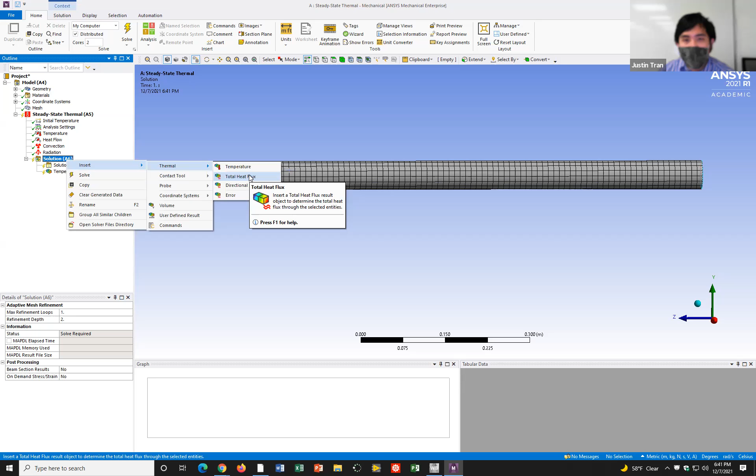Then I'm going to right-click Solution A6 Thermal, and we're going to go to total heat flux here. This is going to express how much heat is actually passing through our surface. Now we have all our boundary conditions and all green check marks, so the only thing left to do is solve. I'm going to click on the lightning bolt here to solve our model.

And we get a temperature distribution that looks like this. Actually, no, that's heat flux. So let's look at temperature first. This tells you how the temperature is throughout the cylinder. On the left side here, you can see that we have a maximum temperature of 100 degrees C. That's exactly where we specified our temperature, right? Since we directly specified the temperature constraint on that side, it makes sense that the temperature there is exactly what we specified it to be.

And on the right side, we can see that we have a low temperature of 47 degrees Celsius. All right, so let's look at the heat flux. The heat flux is an expression of how much heat is, in this case, escaping from the fin. Since our object here is at a higher temperature than the surrounding fluid, because remember the surrounding fluid is only 25 degrees C, since our fin is at a higher temperature,

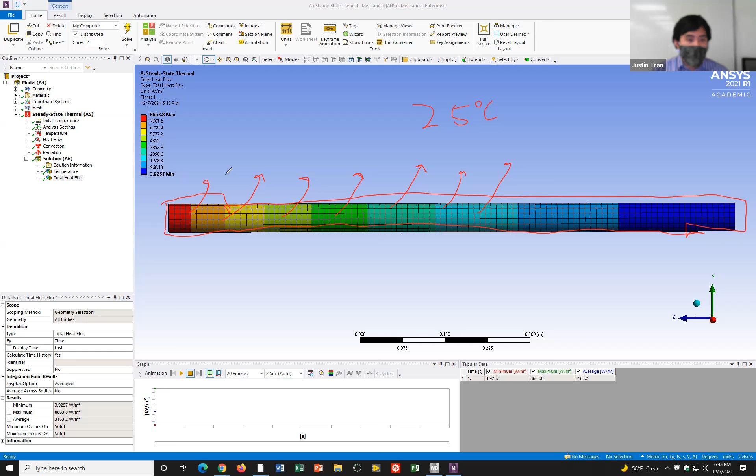Since our fin is at a higher temperature, this tells us that heat is going to escape, because heat always goes from hot stuff to cold stuff. This heat flux tells you the magnitude of how much heat is being lost from the fin. You can see in this region right here we have the most heat loss, about 8,663 watts per meter squared.

That makes sense because our temperature is the highest over here. Since the temperature is the highest here, the difference between the surface temperature and the fluid is greatest, and that's going to lead to the highest amount of heat loss. As you go down the rest of the fin, the heat flux decreases. Any questions on any of this?

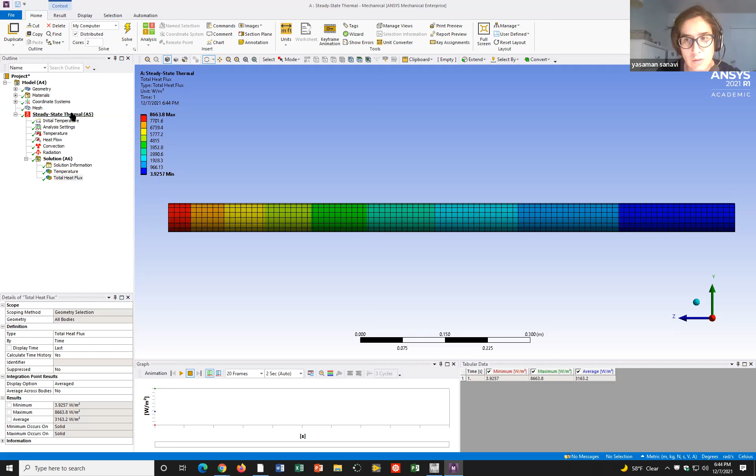Can you show an internal generation term on this cylinder as well? Sure. If you want to add internal generation, you can right-click Steady-State Thermal and go to Internal Heat Generation. The only thing it lets you select here is an entire body, so it's very similar to standard Earth gravity. We're going to apply it on the entire geometry, and we have to specify the magnitude of our heat generation. This expresses how much heat is being generated in our solid per volume.

Let me do something big, actually. Let me do 100 watts per meter cubed, and let's see how that affects our solution. With this boundary condition, we're saying we're generating 100 watts of power per meter cubed of our structure. That actually didn't do much. Let me go ahead and increase this to 10,000.

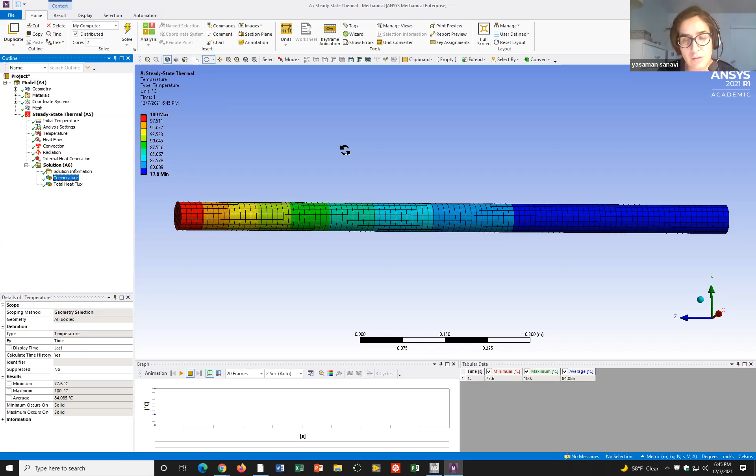So in structural problems, we have the body force instead of the thermal generation term, right? Exactly. Is the body force the same as the gravitational force on the structure? It is, or I should say gravity force is a type of body force. There are other body forces you can include, like electromagnetism, which is a force felt throughout the entire body. But probably the most common one is gravity, because it's felt throughout the entire body as a field effect.

And so because we're standing in a gravitational field, every particle of our body feels that gravitational force. And so internal heat generation is the same thing. When you're generating heat, we assume that every particle on the inside of this structure is generating heat. Yeah. Got it. Thanks. Yep.

Okay, and so we're out of time, and so that's a very quick introduction to thermal simulations. I think we spent more time reviewing 407 than we did talking about this. But if you understand core concepts in heat transfer, and you just apply the same finite element process that we've been going over in this class in ANSYS, it's just a very natural marriage between those two ideas. Okay.

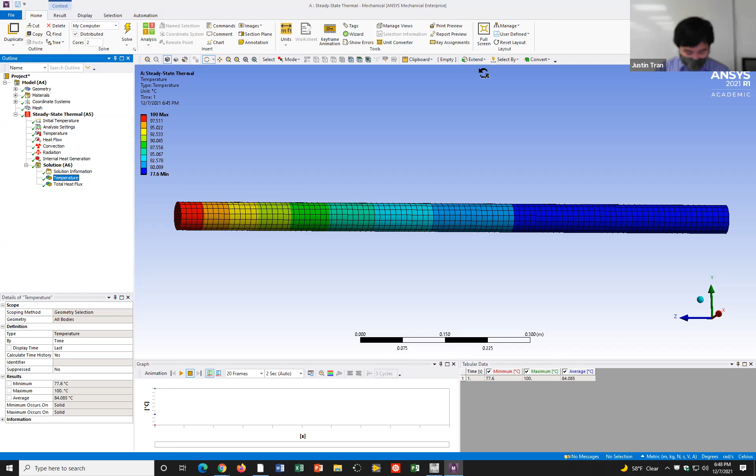I was wondering if there's a way to do a section view, so you can apply boundary conditions inside a solid object. There is, and so there's a way to split an object, and I can show you really quick on this one. I showed this for my grad student, and I actually didn't know this before this year either, so I just found this out. Let me just go to geometry here. Oh shoot, do I remember how to do it? No, that's cool.

I did try changing the geometry, or just literally cut the object in half and simulate that, but I got different results. I see. So towards the corner it's now the stress area instead of the bolts. Yeah, so I'm basically gonna do the same thing where I'm gonna split this model in half. Gosh, how do I do this? Split surfaces from faces. So what plane is that? ZX. Oh, shoot, okay. I think that is what I want.

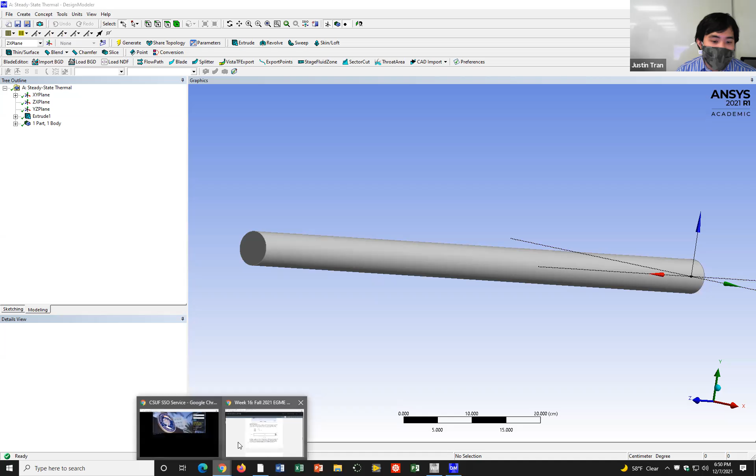Oh, shoot, did I have something for my grad students? I did a demo of it in the class. How did I do this? I don't know if I wrote it down. It might have just been a video. No, it's cool, I'll just search it. It was for their midterm project. Shoot, it was one of these lectures. Okay, no worries. It's fine.

But yeah, if you search on YouTube, like split a surface in ANSYS, section view, then it's not that hard. It was like a 5-minute video on YouTube. Okay. But I have another question. So let's say your hand calculation is way off from the ANSYS answer, is that a bad thing?